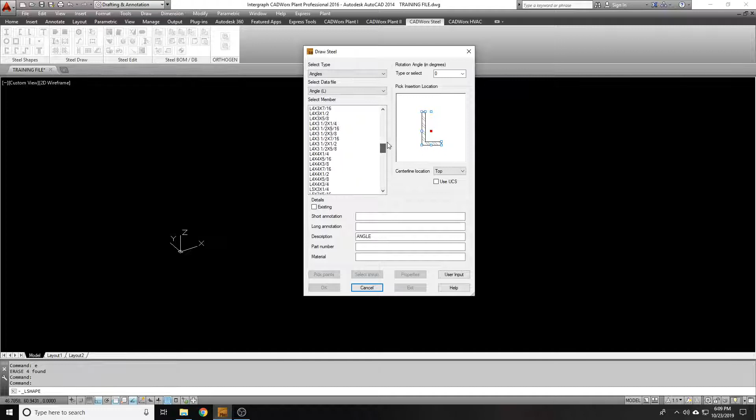For the subsets under the data file, the only thing here is like a filter. You can choose between equal leg and unequal leg, because right now this is both equal leg and unequal leg. If I go to equal leg, I'm only going to get things like L2 by 2, L2.5 by 2.5, L3 by 3. But if I come to unequal leg, I get things like L4 by 3, which is kind of common, L5 by 3, and things like that. So these are the only unequal, or you can just see them all here under just angle.

So let's go to equal leg, and let's pick something like an L4. So I'm going to choose an L4 by 4 by 3/8. Again, insertion point is user discretion. You choose where you think it's best to put it for you. I personally set this at different locations. Honestly, it just depends on how you're working with it.

There are two locations that I use. I use the back corner whenever I'm using that as a work line for bracing, like for welded braces, I'll use this as a work line, or for columns, I'll use it as a work line. So that's my insertion point, is the back corner. I'll also use the center line location at the bottom, because again, what this does is it puts your center line location at the top, center, or bottom.

Again, I stress that the center location for your center line, if I put it here, this is not the gauge line of the angle. So when you're inserting this as a brace, do not assume that the center line is on the gauge line. It's the midway point. So for an L4, the gauge line is 2½ inches, and this midpoint is going to be at 2 inches. It's not a huge deal, but just don't assume that it is on the gauge line.

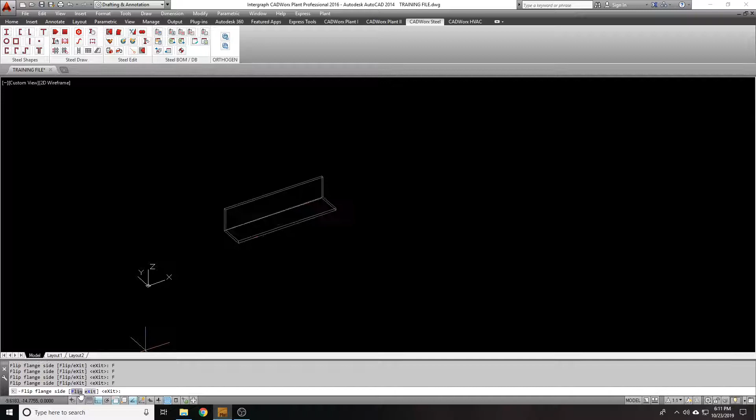All right, let's go ahead and put this in at the corner. And I have mine set to center. I want to set it to the bottom, because I want it to be on that bottom corner. My rotation angle is set to 0. I put it in, and I can flip my flange. Okay. If you change the rotation of this, it will change it around that center line, and it will just do a full sweep, 90, 180, and 270.

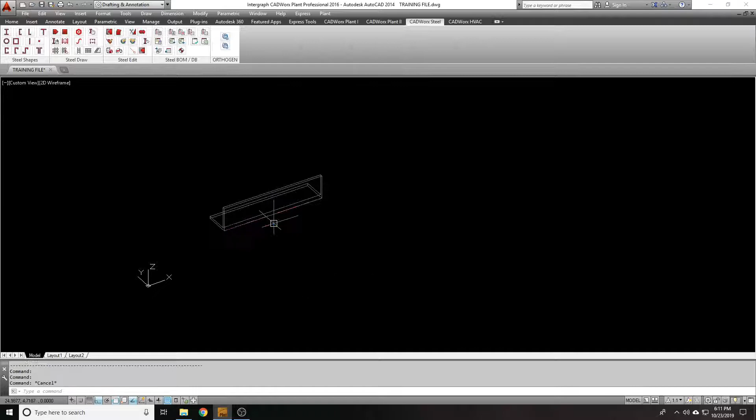And you'll notice that, depending on how you're looking at this, looking at it from the right side, if I set it to 0, it's moving counterclockwise, like you would expect the cardinal directions in AutoCAD. But let's set this up as a column. Let's say we're using an angle column for a T-support or for a platform. So we're going to insert this as a column. Same thing, select line, select it.

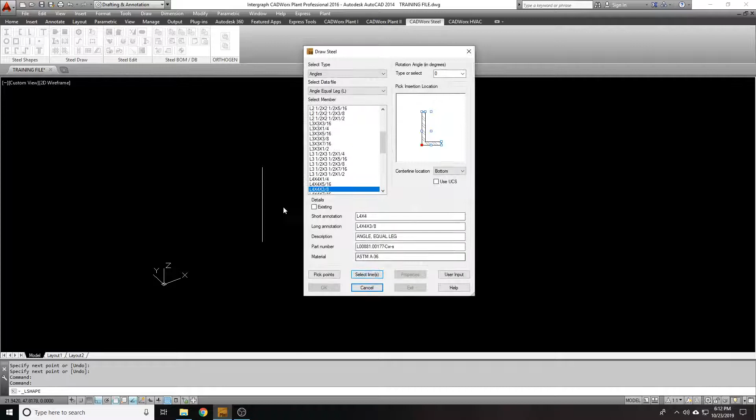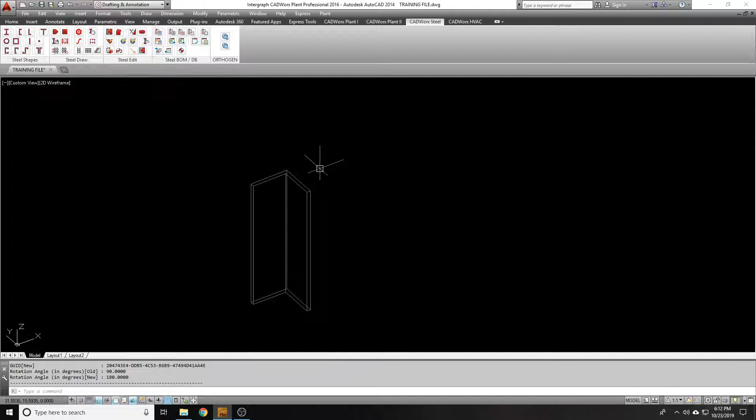Okay. Again, what it's going to do is it's going to rotate around counterclockwise. So we pick 90, and it starts rotating to the left. 180, and it's going to go complete opposite of the 0. This is kind of handy to get used to.

So real quick, I'm just going to draw something. I'm going to put this at 4 inches and 4 inches. I'm going to go to the top view. I want this as a quick reference. This is something you might want to memorize for angles, because it'll help later on.

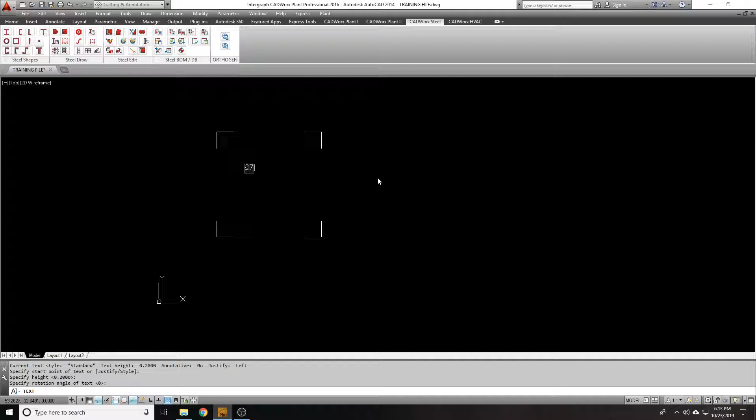I don't even know what my text size is set at. Probably pretty small. And we're going to put 270. Yeah, it's really small. And I'm in decimal, not architectural, but for the purposes of this, it's fine. Maybe put that at 3. There. So these are your angles. These are the rotation angles for your angle.

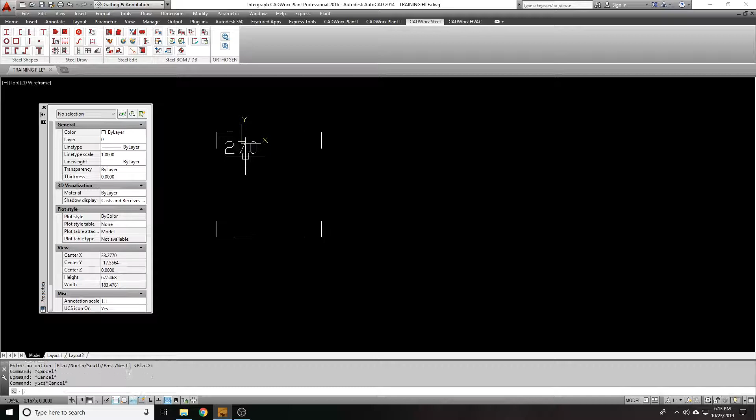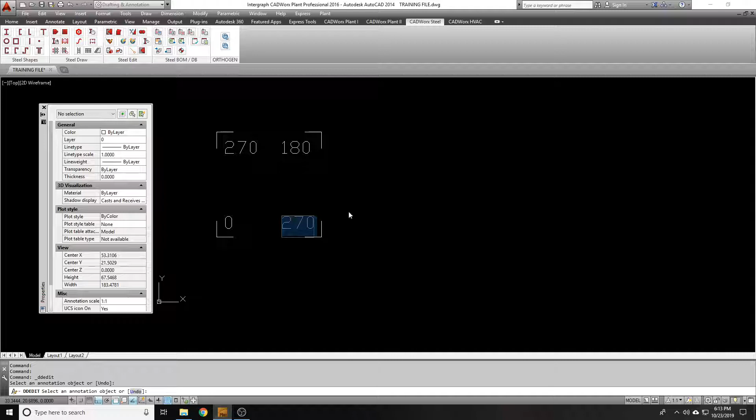Oops, just reset that UCS. Copy this over. I'm missing my command aliases on this installation, which is fine. All right, so here's your rotation angles. I'm actually using 2014, and man, do I miss the repeat DDEDIT. They got rid of it in future versions. When you edit, it just closes out after you edit. It's kind of annoying. All right.

So here's what your orientations will look like. When I come in here and I put that column back in, I'll put it right here in the center. And I'll put that angle in at 0 on the corner. And I look at it from the top. Okay. You'll see right now I'm at a 0 degree. And then I go to a 90 and it looks like that. And I go to a 180 and it looks like that, and so on and so forth.

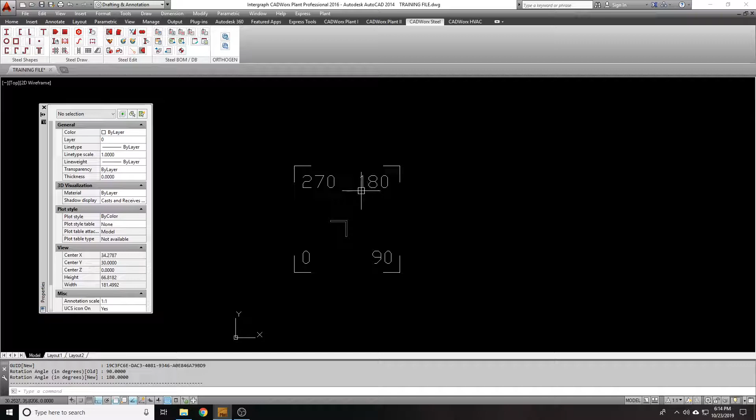The reason this is handy is because when you're building a platform, and I've seen a lot of platforms with angle legs, like man platforms, valve access platforms, things like that, what I do a lot is I'll just copy this, whatever it needs to be here, and then I'll copy this one up, and then I'll just go back in and change each one of these to their respective orientation so that they're all toeing inward.

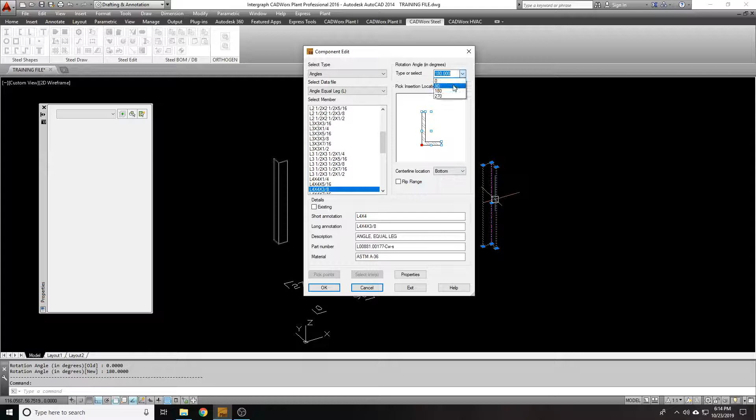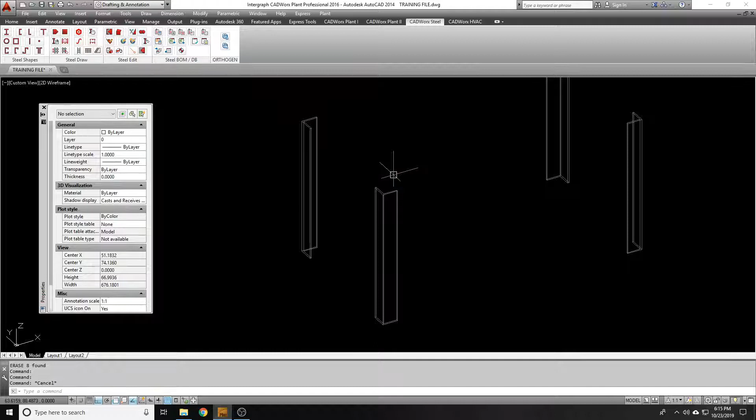I put that at 180. It's supposed to be 90. There we go, 180, because we're just going counterclockwise all around the circle here. And now each one of these is pointing inward, and I can build a platform based off of this. And there may be times where you have to do a flip flange, and you can do that. Sometimes you get options that you wouldn't otherwise have. It just depends on what your situation looks like.

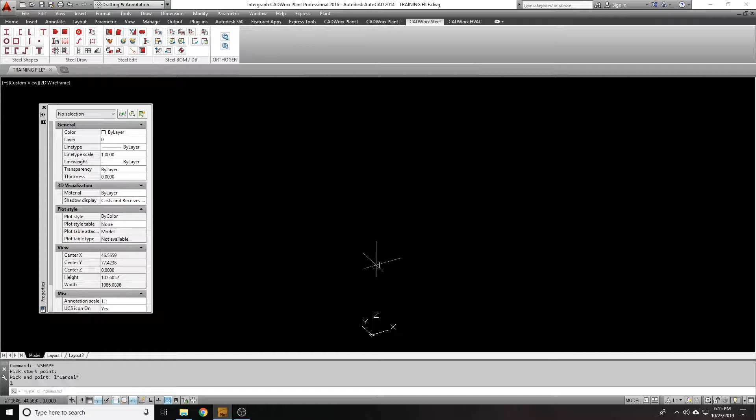So that's for columns. Columns, I use that work line on the corner, on the outside corner. When we're talking about bracing, I'm gonna put a wide flange in here. Oh, forgot. I got to use that line to create that vertical piece. Okay, and what I'm gonna do is draw a brace from the midpoint here. Do less than 45 and just bring it up.

All right. Now, let's say I'm doing a welded connection. When I'm doing a welded connection, again, I'm going to keep it at the bottom corner, and I'm going to keep the center line location at the bottom. The difference being that I'm going to want to change the orientation because I'm not going to want to have my brace toed upward like that. And I just realized I drew this wrong. I wasn't in the right UCS. There we go. Oops.

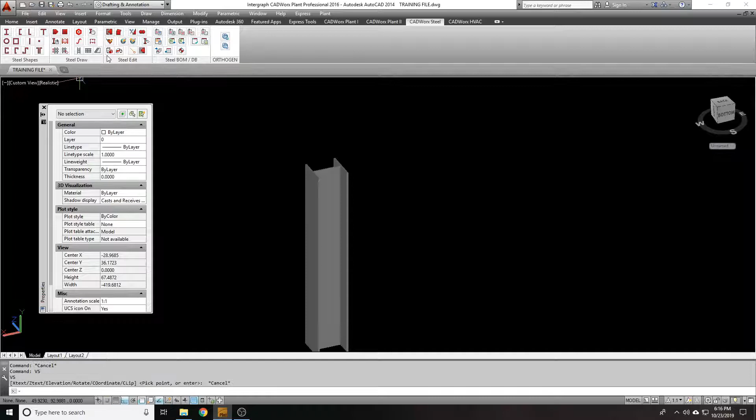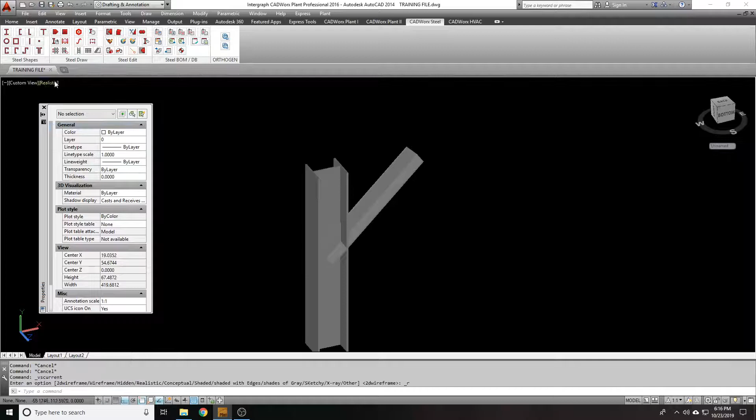None of my command aliases are set. It's all right. It's okay. 2D wireframe. Let's try this again. Midpoint, less than 45. Much better. Okay. Draw this angle again. Now let's look at it. Realistic. Let's do conceptual. It might be a little easier to see what's going on with conceptual. Okay. Ugly, but you can see it easier.

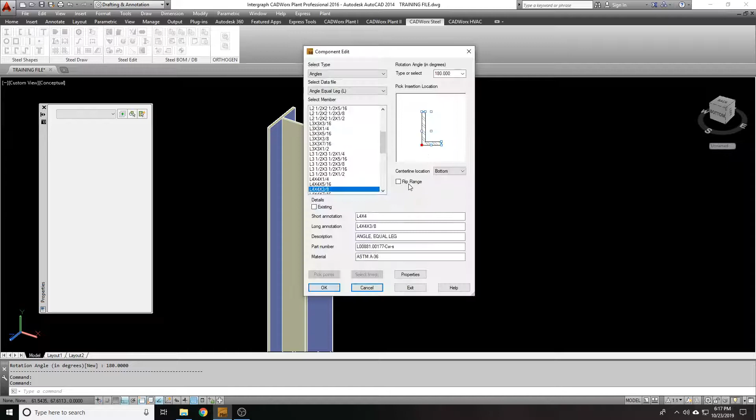All right, you can see how it's toed upward. That's not how we're gonna have a brace angle look. So we want to rotate that 180 degrees. Now we've got something that is workable. At this point, you can do a flip flange, which will flip it the opposite direction if you needed it to toe out to a different direction. You can also rotate it 90 degrees, which will kind of do the same thing. It's just changing the rotation.

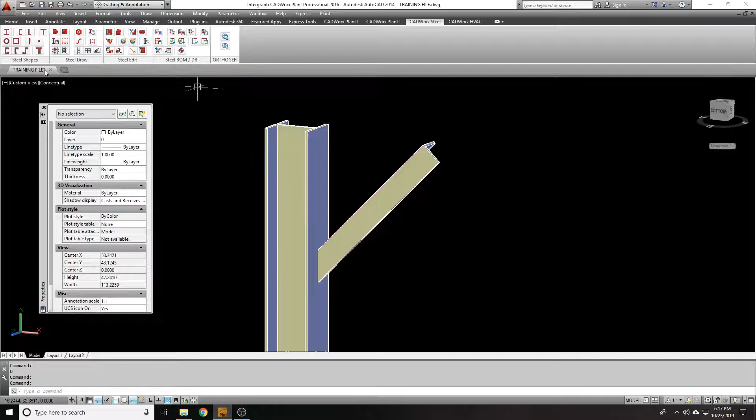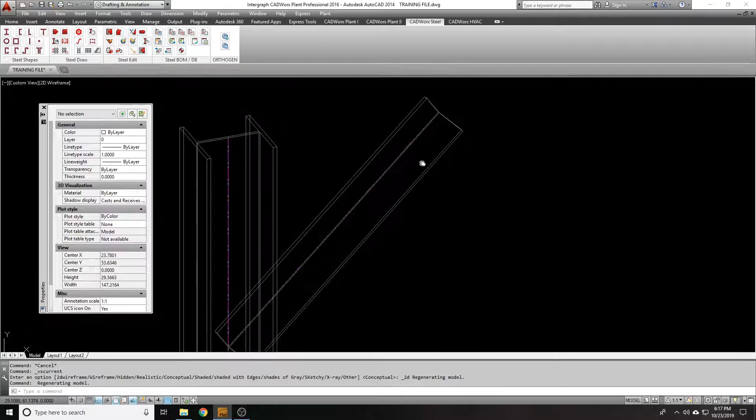So now we've got it angled the right way, 180 degrees. This is where I would have the work line set if I was doing maybe a welded brace. But say I wanted to do a bolted brace, like it's going to be a gusseted connection. I'm going to want to have that center line closer to where the gauge line would be. It doesn't have to be on the gauge line. You can do that, it's more advanced, but you can get it close enough, which is fine for me. So I'm going to double click this, and I'm going to change the center line location to the center.

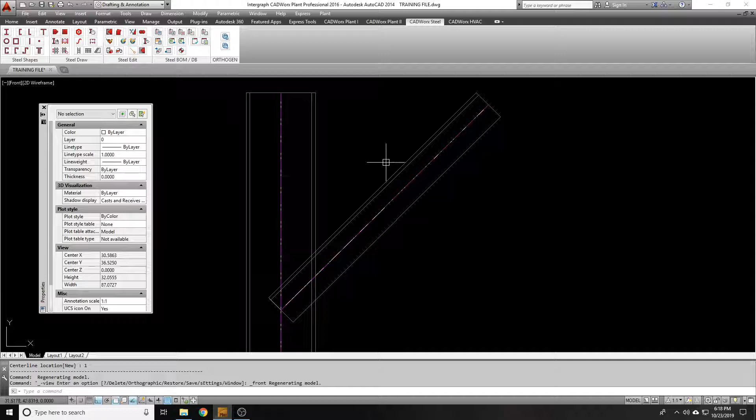And I'm also going to change the insertion to the center because I want them to match. Hit OK. And there we are. You can see that work line is in the center of that brace. So let's look at this thing from the front. Here's my angle coming in, and here the center line is at the center of that brace, which is close to the gauge line. Not exactly there, but it's close enough. It gets the point across that it's going to be a bolted connection.

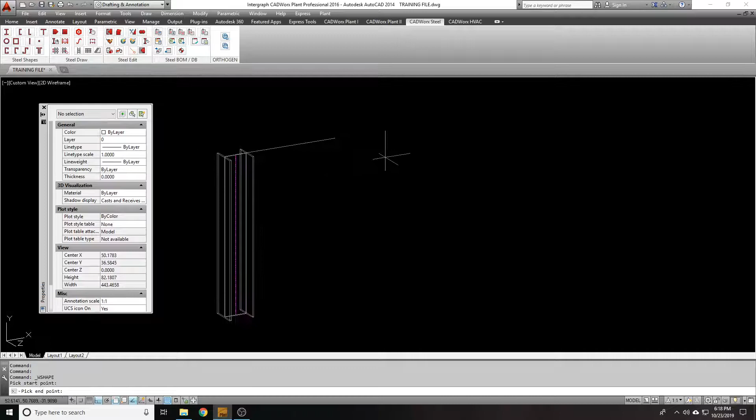So that's an instance where you would want to use the insertion and the centerline location not on the corner but in the middle. Same thing applies to horizontal braces. Let's say we have a horizontal brace. Oops, let's change this to top and top. There we go. Bring this down a bit. And let's say that we have a brace.

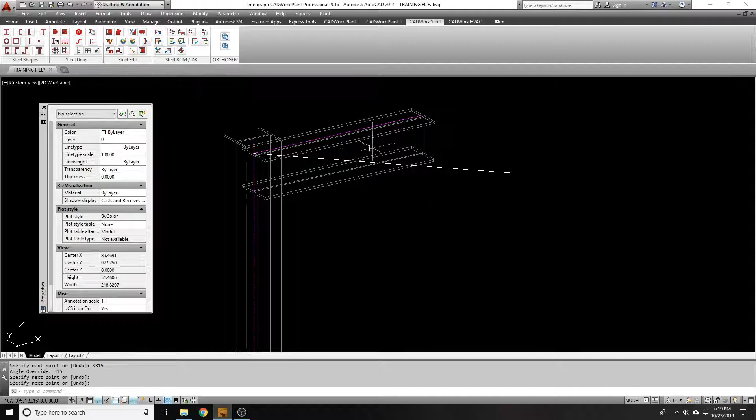I'm going to put a line here, change my UCS to world, draw a line here, less than 315 is fine. So we have a horizontal brace coming in here. I'm just going to use a quick example. Again, with the angle, I'm going to set that insertion point to this side and go to center and change it to 90. And now we're on top. We were previously at 180, we were on the side for the vertical brace.

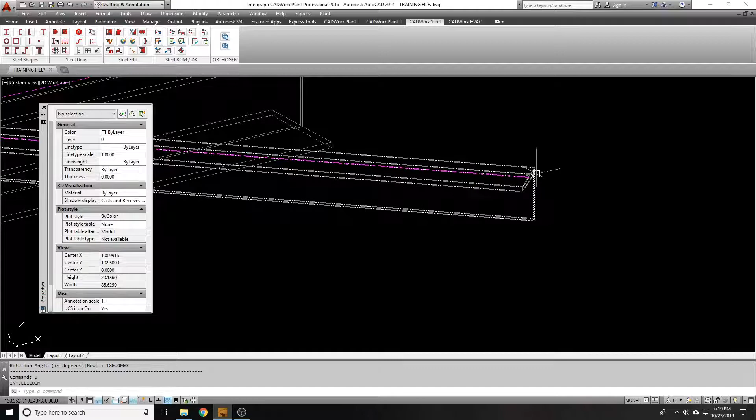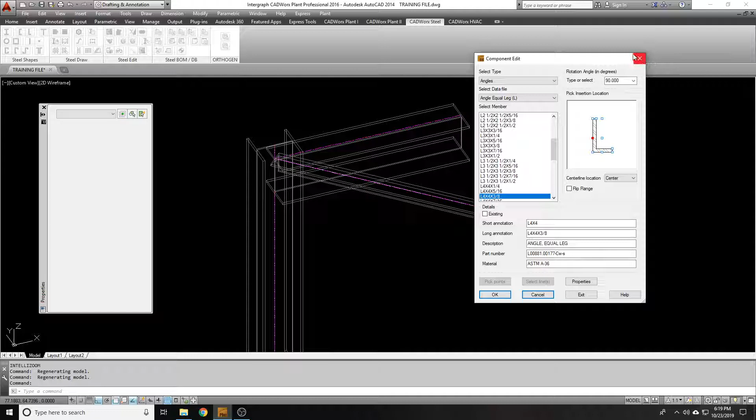But now as a horizontal brace, by setting it to 90, our center line is centered on the brace, and on top of the brace, which now has a horizontal orientation. So that's where you'd want to set that insertion point and center line location to the side of the angle. So angles can be a little trickier. This is especially apparent when you're dealing with unequal legs. Flip flange doesn't really matter too much when you're using equal legs. Flip flange matters a lot when you're talking about unequal legs.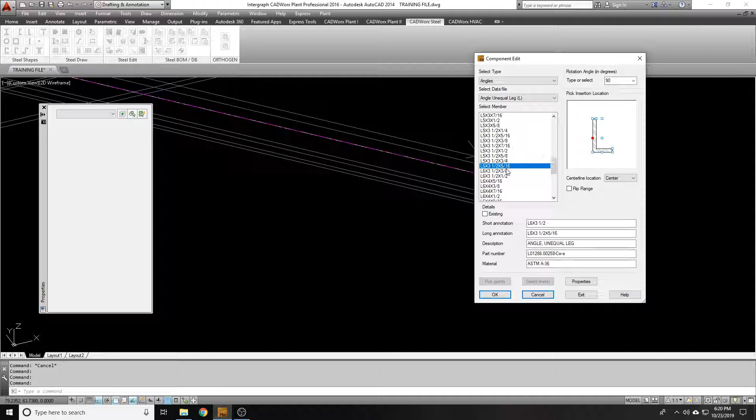So let's change this from an equal leg to an unequal leg of something really dramatic like a 6x4. Or even a 6x3.5. No, we can't do that. Wait, we can, 6x3.5 by 3/8. Something that's really dramatic. Okay. Now we have a long leg horizontal. Let's say we wanted to go long leg vertical. How would you accomplish this? Because as I rotate this, I can't go to 180 or I can't go to 270. It's going to turn up, right? We want to turn down.

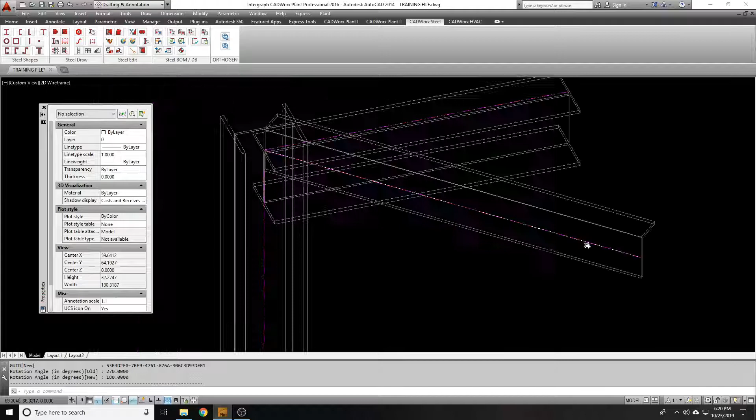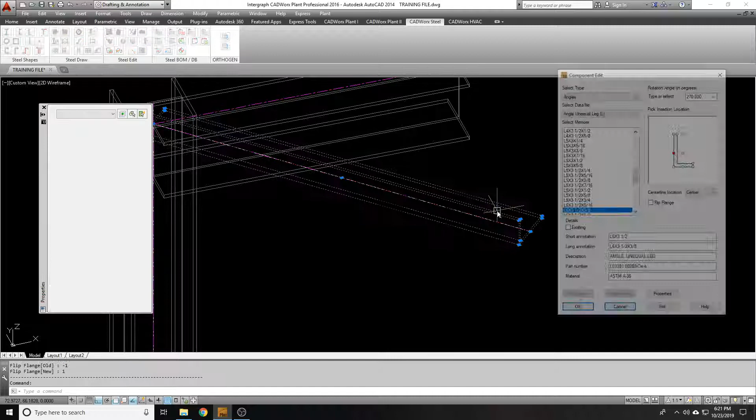If I go 180, you could do this and it does turn down. However, it changes the properties because now my center line is on the side. We need my center line to be on the top. So the way to do this is to go 90, right? And see if we can do a flip flange on this. And it's probably not, because it's going to want to flip the little flange up. So you have to find the right balance for this. So the way to do this is probably go 270. There you go. 270 and you flip flange. Because 270 normally points up and now it wants to flip the little leg down.

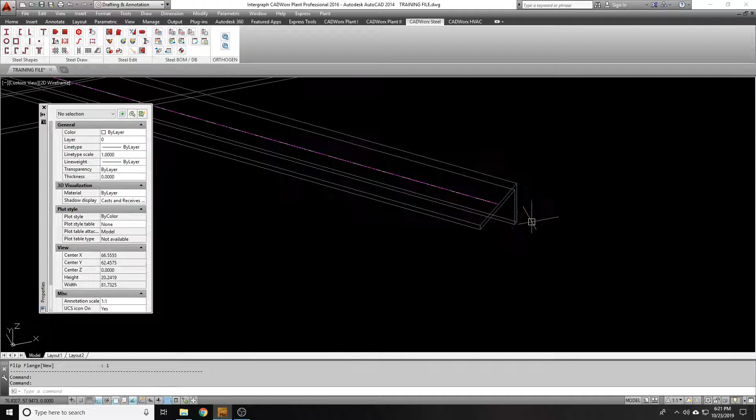Go back to this. Turn my flip flange off. We were at 90, weren't we? Oh, we talked about wanting to go long leg vertically. That's a little difficult in some situations. So again, you kind of have to play with it. Even myself, it's one of those things that's really hard to remember how things are going to work out. In this case, they actually won't let you do the opposite, which is go 3.5 to 6. But it's more apparent when you're working with columns and stuff like that.

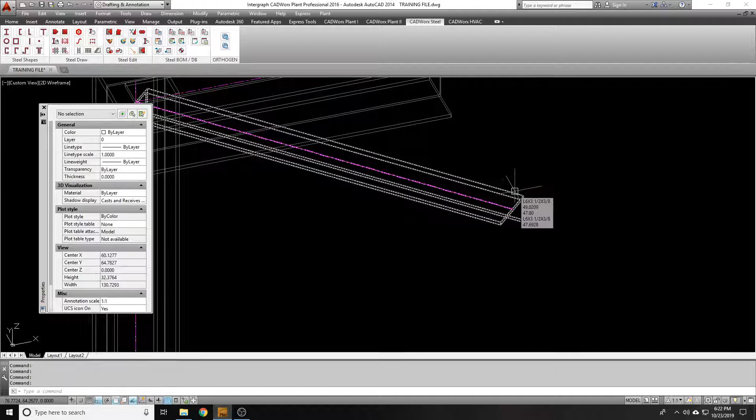But you'll have to play around with it to hopefully get the orientation that you're looking for. Because it is possible to get this thing to go vertical, but it's going to take some playing around. So that's where your flip flange is going to come into play, because it's going to come in handy to help with the unequal legs. So angles can be tricky, but over time you can get used to them. But you're going to use those for, like I said, your columns, your horizontal braces, T supports. Sometimes you have a small T support. You can use them in that manner. So I think that's it for angles. That's kind of the summation of everything involving angles.